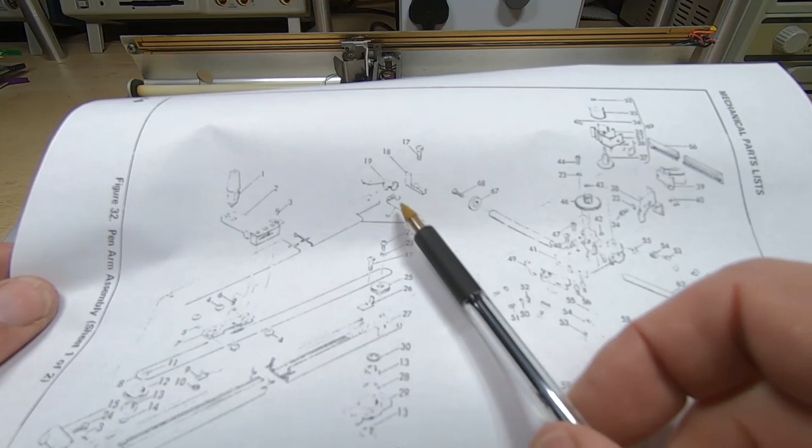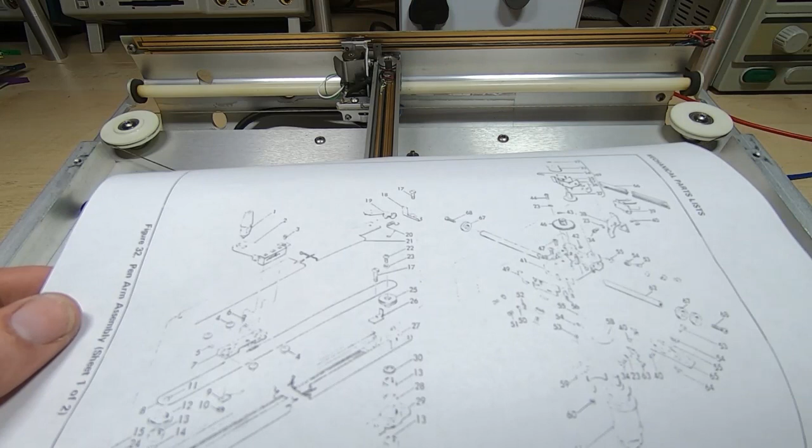So the parts that are missing are this part, parts 19 and 20. We've got a lever that sits between the pen lower raise solenoid and the bar that runs up and down here. When I received the plotter, the bar was with it, it's got a bend in it, I still need to straighten this out, but it wasn't fitted to the machine. It was just loose in the box, and the parts I subsequently realised were missing fit in this area, and they're used to control the angle of this, which in turn raises and lowers the pen onto the chart paper.

And this is what the manual is like. This is the best copy I have, and as I say, these are the parts I had to make, and even if you zoom in, it doesn't really help. So these are the parts. You can kind of see vaguely what's going on here, but this drawing doesn't even match the photograph in the same manual, and the only photograph that includes that part is this one, and in all the other photographs it's been removed.

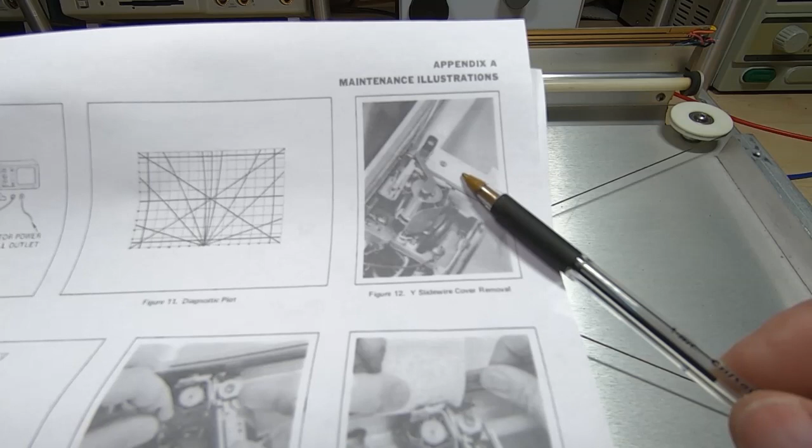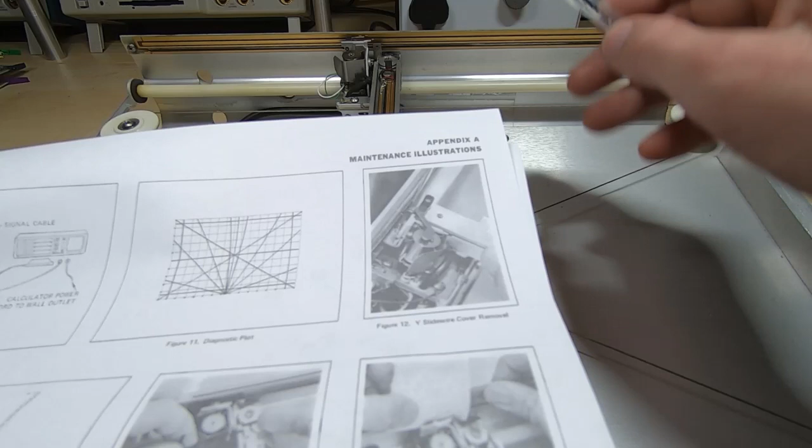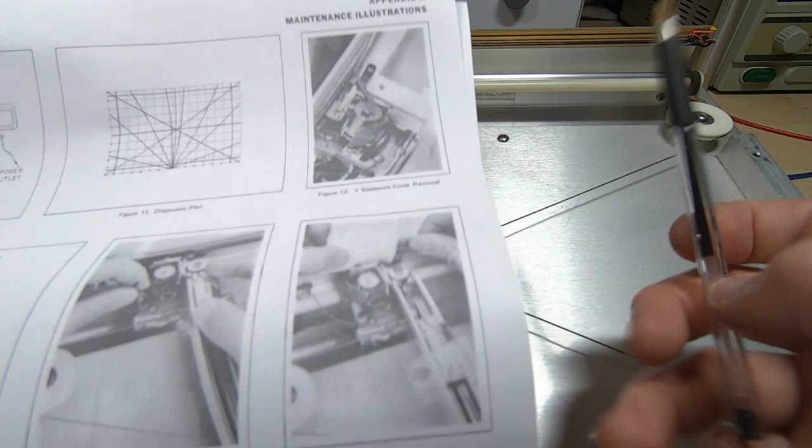So it's very unclear exactly how it's arranged. You can kind of see the general profile, but not how it interacts and engages with the parts it's meant to control. Also things such as the spring tension required, because all this has to be sprung to allow the pen to take up variations in the platen and in the pens themselves. And if you press it, you don't want it broken, and at the same time this cover needs to be hingeable, it has to be able to be raised. This drawing doesn't really help, so I had to try and figure it out.

I have subsequently received some very good photographs from a subscriber, and it does look like the solution I'd come up with is very close to the original. This is what I eventually ended up making. It's quite a complex shape, but it's the lever that sits between the solenoid and the pen lift control bar. I'd already made this, but it does appear to be very similar to the final version.

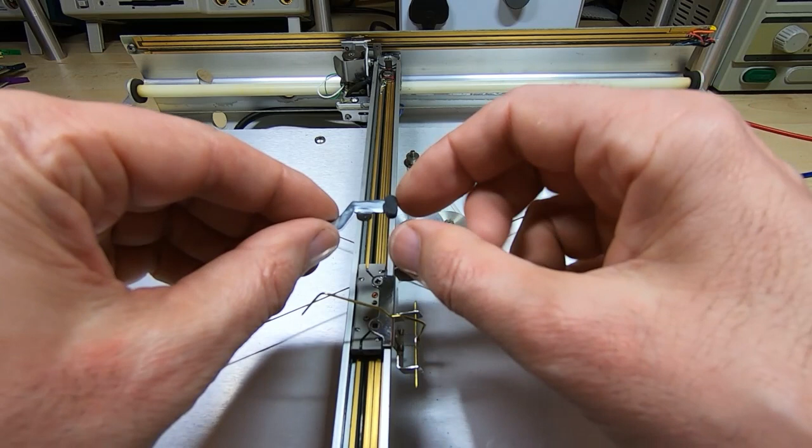The only thing I couldn't figure out is in the photographs it showed a plastic piece on the end. I'm not really sure exactly what form that should take, but I think the idea is that it's meant to rotate to allow you to disengage this from this bar. Can't confirm that, and I've asked a couple of people, but they're not quite sure. So I've made this so it does rotate, and I can then rotate it out of the way once it's fitted, giving me the ability to raise and lower the cover without having to take all this off. So I'll get this fitted.

The only question mark really, it seems to line up, is over the spring tension, so I may have to make a stronger or weaker spring. I suspect this might be a bit too strong, but this is what I'm going to go with for now, and once I get the machine hopefully up and running, I can see how well it works, and then whether I need to modify this and make a new spring. Okay, so I'll get these fitted, we'll have a quick look and see if it actually works.

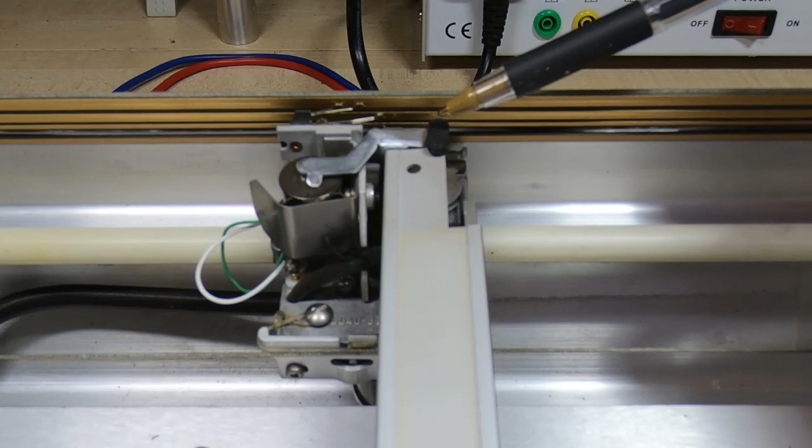So that's what the parts look like when they're fitted, and I don't know if this is correctly adjusted yet. It might need a bit of tweaking, and as I say, the spring might be too strong. But if I now operate this from the bench supply, you can see it's working quite well. And also if I rotate this little tab out of the way, which I think is how it's supposed to work, then it allows me to open this flap without having to take this entire assembly out.

I'm not quite sure if this is how it's supposed to work, but it does seem to work quite well, and it means you can open and close this very quickly. As you can see, it's very quick.

Now the other thing I did: this little plastic piece is 3D printed, and I made it the correct dimensions so that when the solenoid is energized, this plate is all the way down onto its stop. There's a stop at the bottom that dictates how far down it can go, so I arranged all this so that with the solenoid energized, it was all the way down on that stop. I don't know if that's how it's supposed to be, but it seems to make sense and operates quite well. Fingers crossed it will work when I reassemble the entire machine.

I still have something similar to do with the pen holder. I've got to figure out exactly what shape and size it should be. A subscriber has sent me some nice photographs of the pen holder fitted to the machine, so I just need to figure out exactly how it attaches, and then hopefully I can 3D print one and attach the pen.

I'm not too concerned about the pen just now. I want to get the plotter plotting first, and then I can come back and look at the pen holder later. So the next step is to get this put back into the main machine.

I just want to give it a final clean, lubricate it, and check the belt tensions are correct. I think the Y belt or cord is a bit loose. Once I've done that, I can refit it all into the machine. If it all works, I'll paint the little lever I've made to stop it going rusty, and hopefully that's this part sorted out.

I have checked the backlash in the two gearboxes, the two motors, and they seem fine. Everything else seems to be connected the way it should. Both of the potentiometers are giving me sensible readings.

Incidentally, this potentiometer actually includes end stops or end switches. It's got two top tracks. The center one, the long one, is the common track, and at either end this section is one of the end travel switches, with another one at the other end.

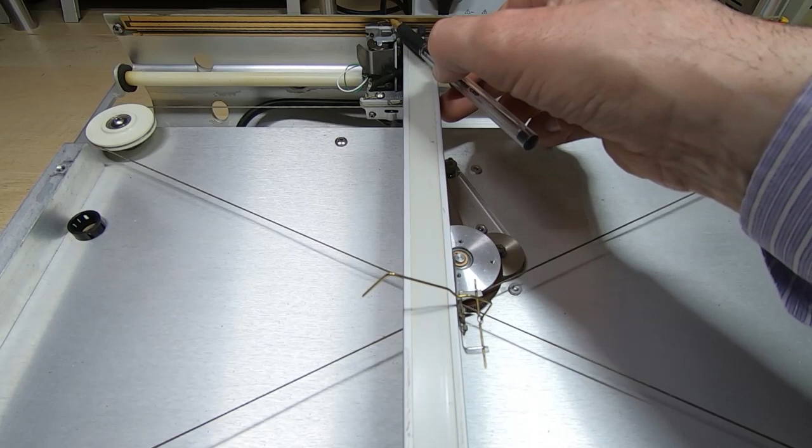There are two offset brushes both running on this same top track, and when the end of travel is reached, the first brush - in this case the one on the right hand side - leaves this track and goes onto the other track. These two brushes are connected together, soldered to a common fitting, so when you reach the right hand end of travel, these two points are joined together and it closes a loop, and the same at the other end. The two brushes close this gap and trigger or tell the machine it's at this end of the travel.

It's quite clever, and you've got the same sort of arrangement in the y-axis as well. So it's not just the potentiometer, it also includes two end of travel switches. I have tried them and they do work. At the moment it's just a mass of wires sticking out the back, but these are the wires I need to get connected to the motherboard that I mentioned in a previous video.

Now I can get this refitted to the chassis, get those wires reconnected, and we can start to reassemble the main unit.

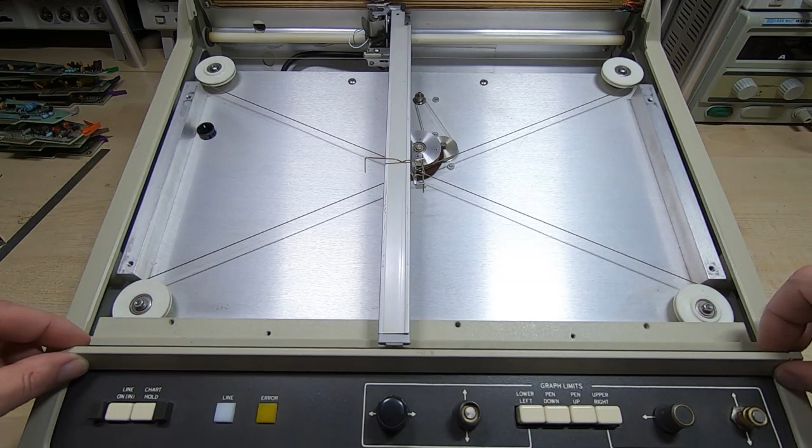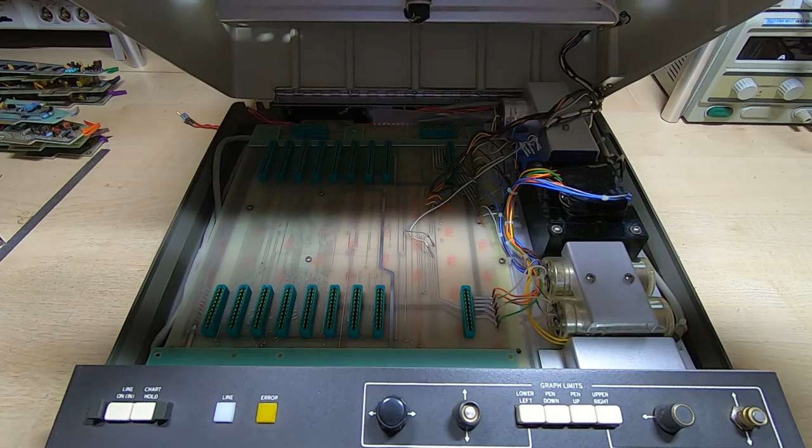That's the plotter sub-chassis fitted back into the case. When fitting this, there are two tabs either side moulded onto the outer cover, and this bar just needs aligning with those. When I got this they were quite a long way out, so I've made sure they're aligned, and I can now get the connections refitted onto the motherboard, refit the power driver board, and then in the next video we can start looking at the electronics and see how much work is required to get this up and running.

I'm going to leave the platen off for now so I can access the inner workings of the plotter. I don't need it at this point to do the testing. The next step is to start looking at the electronics, and I will do that in the next video.